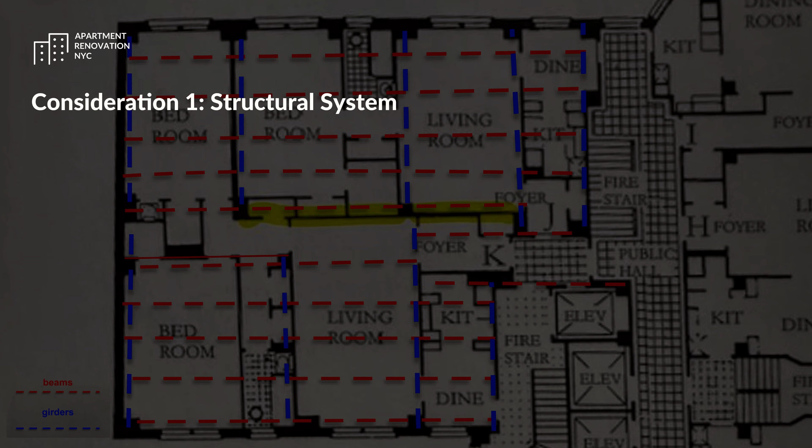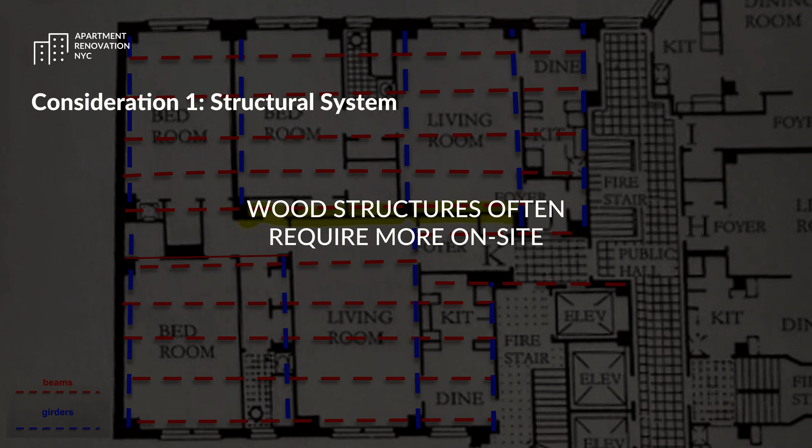Insights on New York City apartment renovation projects. We're going to discuss several typical considerations for renovation projects driven by the requirements of governing building codes, condo co-op alteration rules, and existing conditions limitations. Consideration 1. Structural system. The structural system of the building, whether wood or concrete, impacts renovation planning. Wood structures often require more on-site investigation to assess possible design changes, while concrete systems are generally easier to evaluate visually.

Consideration 2. Window placement. Window placement is important for light and airflow, especially for habitable rooms such as bedrooms, living rooms, dining rooms, and studies. Occupiable spaces such as bathrooms and kitchens require mechanical ventilation if there is no adequate window available. Floor plan layout design for apartment renovations in New York City is heavily impacted by existing window locations and sizes.

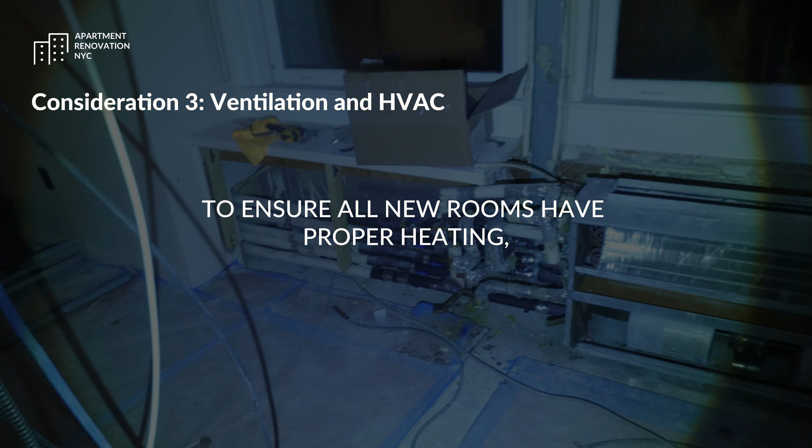Consideration 3. Ventilation and HVAC. Existing ventilation and HVAC layout must be considered to ensure all new rooms have proper heating, cooling, and ventilation after any floor plan changes. Some condo co-op board rules do not allow changes to existing building HVAC systems, while others do. An architect shall study house rules for each building in New York City carefully to be able to inform owners of floor plan design possibilities.

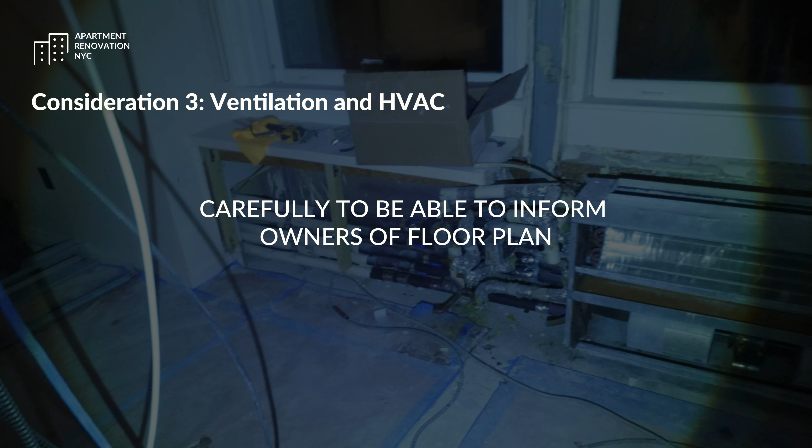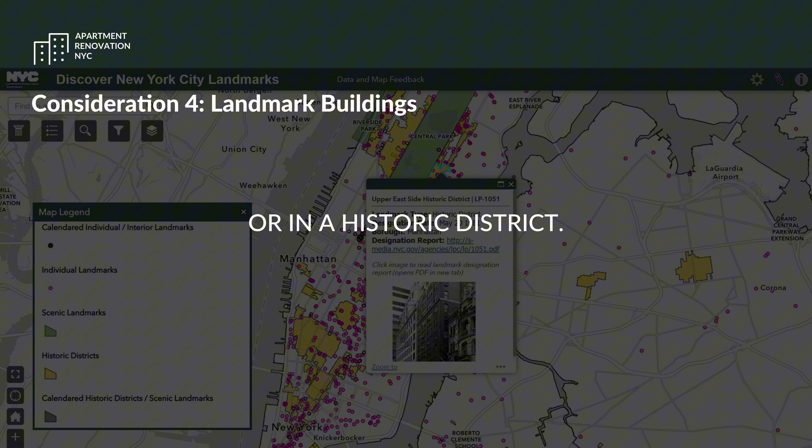Consideration 4. Landmark buildings. A building may be a historic landmark or in a historic district. If the building falls into these categories, the work being performed must be brought up to the Landmarks Preservation Commission, LPC, and have the appropriate paperwork filed.

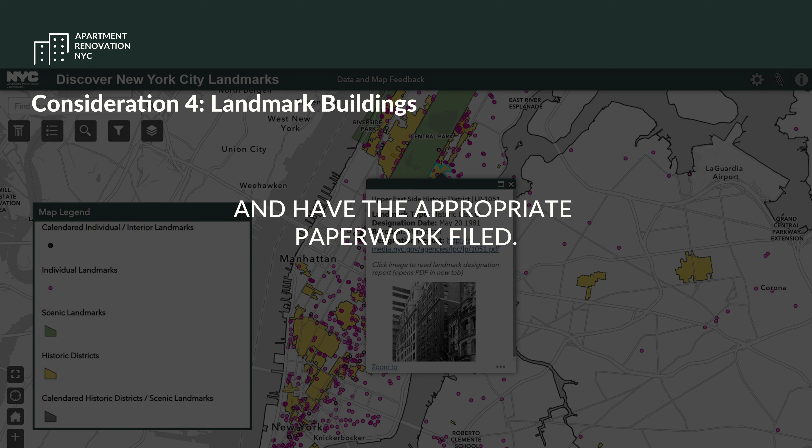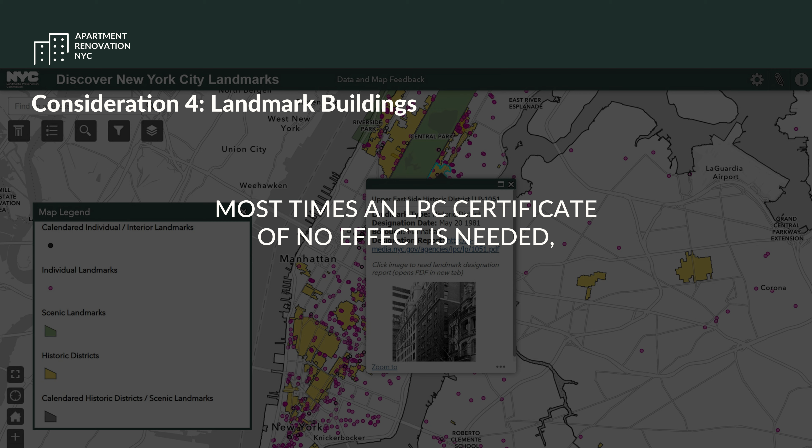A full LPC review would be required if changes are proposed to the exterior facade, including replacement of windows. For interior renovations in New York City, most times an LPC certificate of no effect is needed, which our office typically obtains within approximately 1 week.

Why renovating in New York City is unique. With so many pre-war and post-war buildings, the average New York City apartment in Manhattan is around 100 years old. If your building is older, be aware of the common surprises when completing an apartment renovation in New York City.

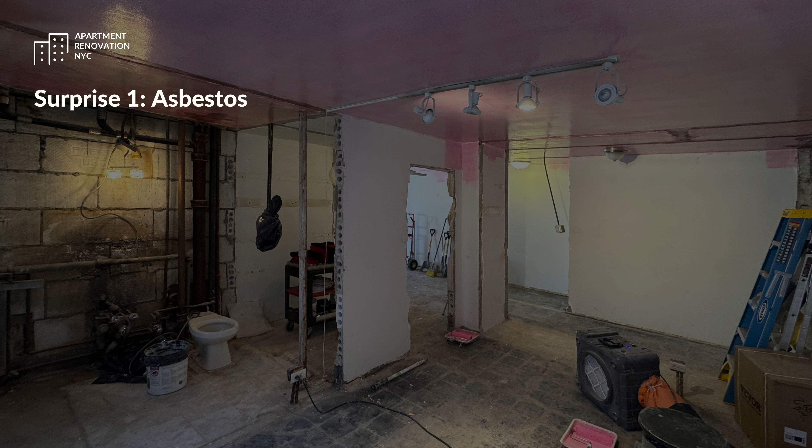Surprise 1. Asbestos. Asbestos is frequently found in old flooring, mastic, pipe insulation, and plaster. It requires sampling by a DEP certified asbestos investigator of all materials that are to be disturbed by the proposed renovation scope of work. If testing produces positive results, an architect shall strategize whether asbestos can remain undisturbed or shall be abated by a New York City licensed asbestos contractor based on the renovation design.

Surprise 2. Insufficient electrical loads. Each apartment renovation in New York City with proposed new or replacement appliances or equipment requires a licensed electrician to provide an electrical load letter for the architect's review. The electrical load letter would account for existing and new or replaced items and provide a summary on whether the apartment's existing electrical load capacity can support the proposed design.

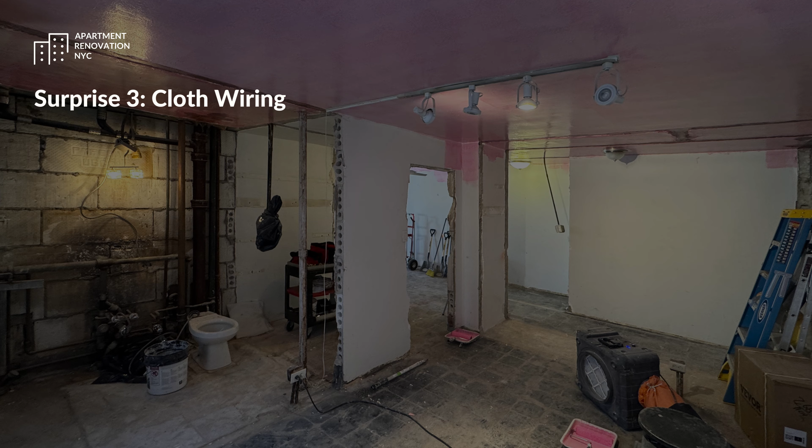From time to time, older New York City apartments cannot support modern appliances or air conditioning. An electrician may need to upgrade your panel and wiring as part of an apartment remodeling in New York City, which occurs most frequently with full gut New York City renovations. Surprise 3. Cloth wiring. Common in pre-war buildings, cloth insulated wires are outdated and unsafe. Full rewiring is typically required to meet code.

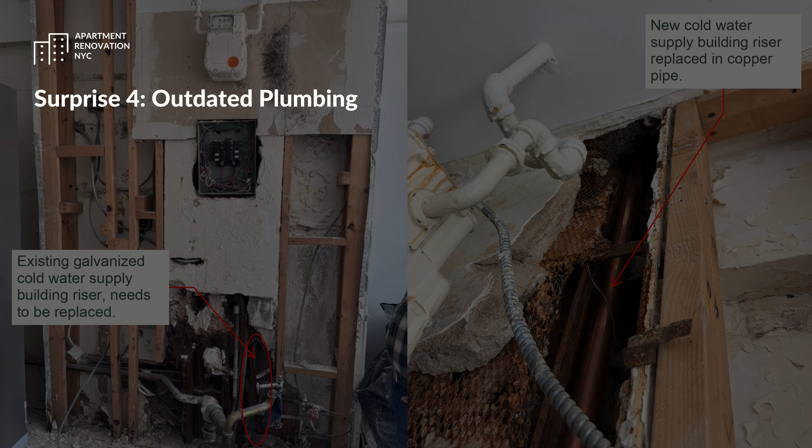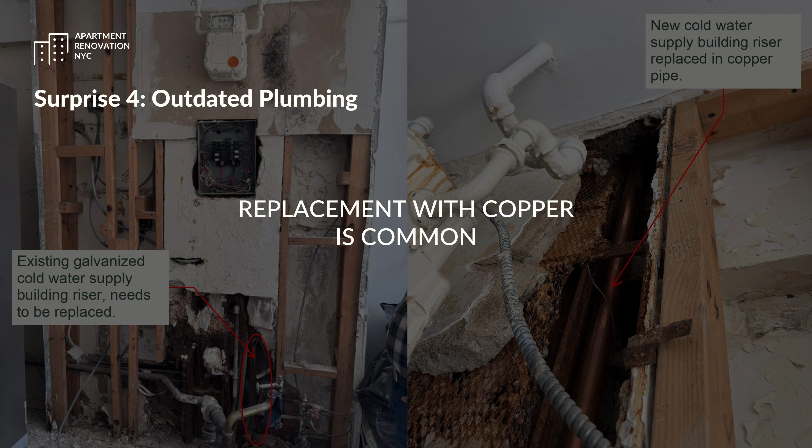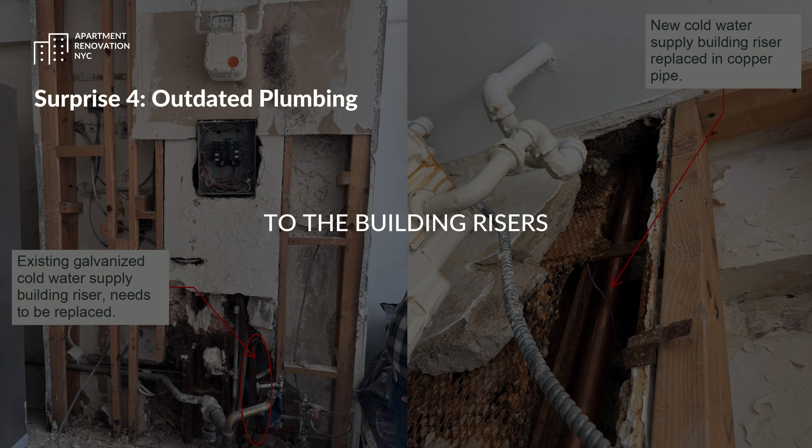Surprise 4. Outdated plumbing. Old galvanized pipes, commonly used in the past for building risers, often lead to leaks or poor water pressure. Replacement with copper is a common upgrade during renovations, especially during a bathroom and kitchen renovation in New York City. Typically, all branch lines need to be replaced to the building risers with any work on plumbing fixtures, unless replacement of fixtures is past the wall finish towards the interior space.

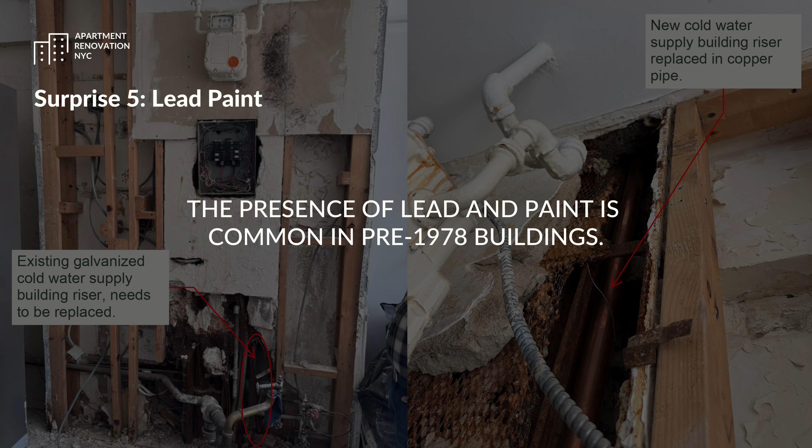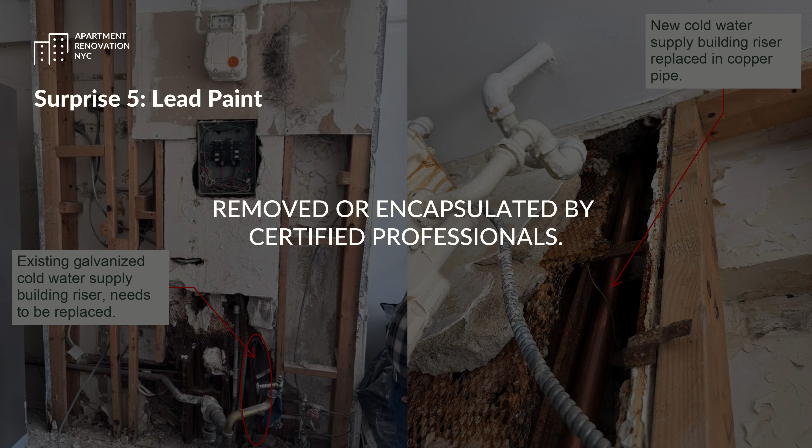Surprise 5. Lead paint. The presence of lead in paint is common in pre-1978 buildings. Surfaces must be tested and, if found, properly removed or encapsulated by certified professionals. This is becoming more frequent with Local Law 31, the Lead Abatement of 2023, which mandates testing of all dwelling units and common areas.

Hiring an architect for your New York City renovation. An architect is your advisor throughout the apartment renovation process, guiding you from establishing your goals and budget through design and technical drawings to contractor selection and construction oversight. Our team helps manage the project every step of the way, ensuring quality and smooth permit closeout.

Do I need an architect? Yes. If you live in a condo or co-op in New York City, your apartment renovation will need to comply with your building's alteration agreement and house rules. In addition to city permits, your plans typically require review and approval from the building's board. Both the board's review and the New York City Department of Buildings require signed and sealed drawings prepared by an architect.

An architect guides you through this process, coordinating with both building management and city agencies to keep your project on track and compliant. It is wise to review condo and co-op board rules early on in the design process. Alteration agreement breakdown. These documents outline what changes are allowed, as well as procedures for approvals, working hours, deliveries, and protecting shared spaces during construction.

Alteration agreements vary by building, but typically include scope of work review. A building's architect or engineer must review the detailed plans prepared by your architect, highlighting the scope of work being performed, ensuring your renovation complies with building standards, and helping to streamline the approval process.

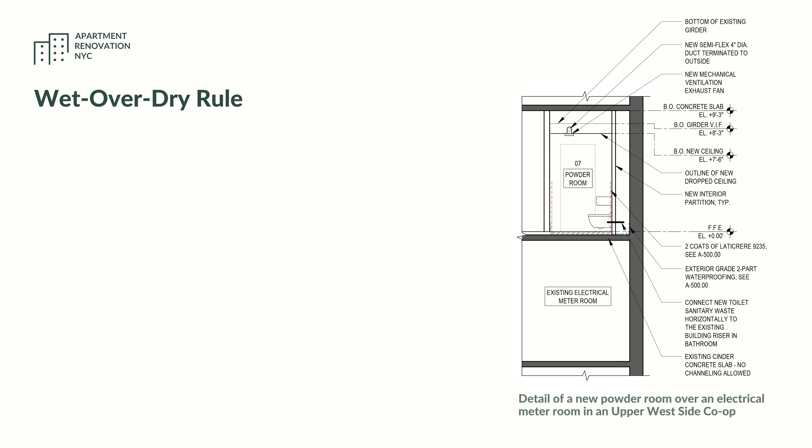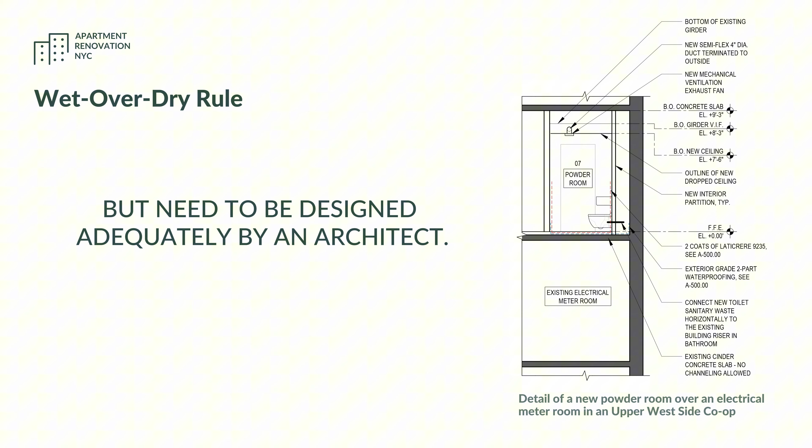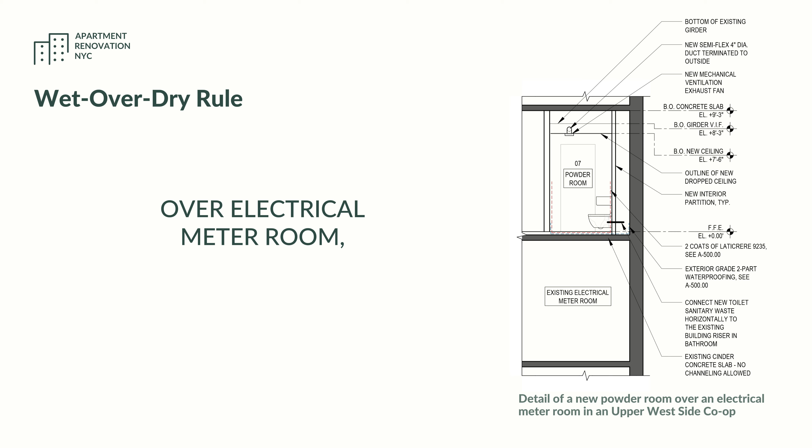Wet over dry rule. The wet over dry rule is a key consideration in New York City apartment renovations. It is an architect's responsibility to engage with the board and propose solutions to address any concerns. As a rule of thumb, wet over dry areas are accepted, but need to be designed adequately by an architect. Even in more complex scenarios, our team has designed wet over dry areas in the context of a new powder room over an electrical meter room, which required careful consideration for the new powder room floor assembly.

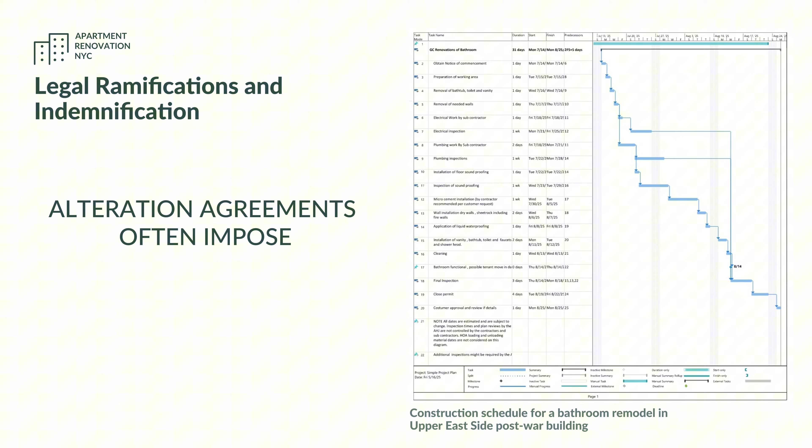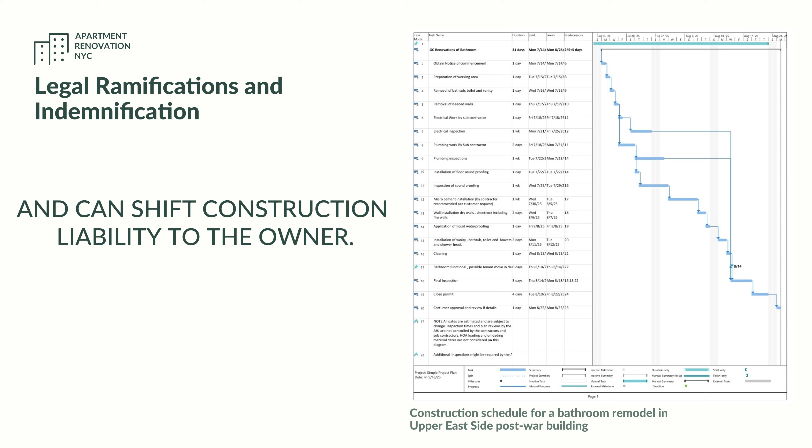Legal ramifications and indemnification. Alteration agreements often impose strict timelines, financial penalties for delays beyond the estimated renovation completion date, and can shift construction liability to the owner. Retaining an architect experienced in construction administration and contractual matters is essential.

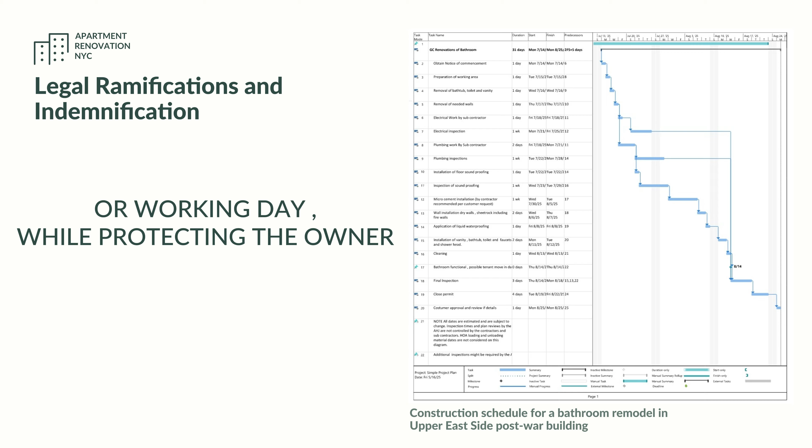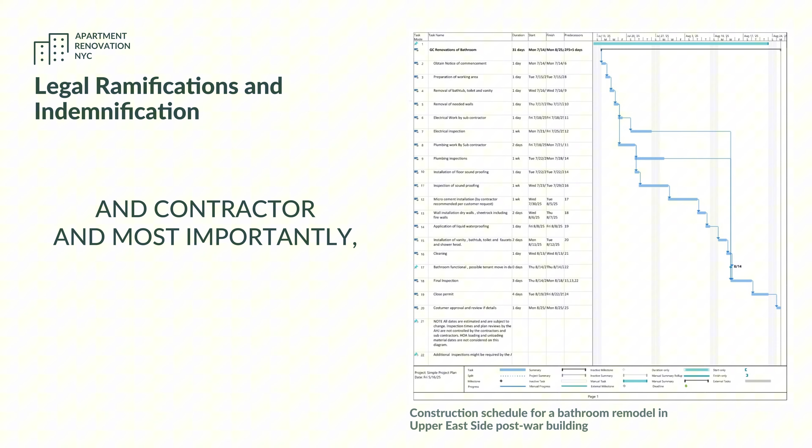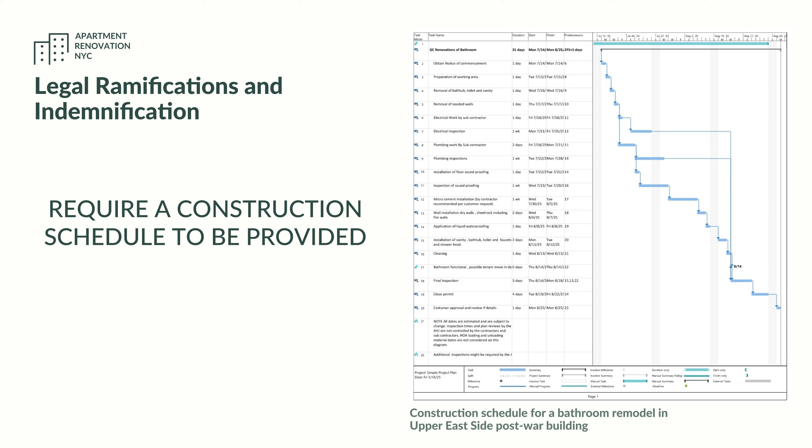A well-written contract between owner and contractor requires the contractor to complete work within the agreed number of calendar days or working days, while protecting the owner by introducing a clause on liquidated damages, where the contractor is responsible for fees and delays. It is critical that an architect advises on the form of agreement between owner and contractor, and most importantly, the owner should not sign a contract with a builder on their own and without an architect involved. Condo co-op boards typically require a construction schedule to be provided for board or management approval.

Building condo or co-op board review. Your building will have its own architect conduct an alteration review of your renovation plans, primarily to protect the building from liability. The cost for this review is sometimes passed on to the owner, and in Manhattan or Brooklyn typically ranges from $1,000 to $2,000. This process can involve lengthy communication and potential delays, especially without an experienced design team.

The key to a successful condo co-op board review process is that your New York City apartment renovation architect addresses the building alteration agreement requirements within the initial submission of the drawings for the board's review. It normally takes a few rounds of reviews until a renovation application is fully accepted. Once management completes their review, the board will consider your plans for final approval, which is required before you can start work. Our firm coordinates closely with management and the board to keep things moving.

Budget and timeline for your New York City renovation. A well-planned budget and realistic timeline are essential to a smooth apartment renovation in New York City. Whether you're pursuing a full gut renovation or looking for a more affordable remodel in New York City, with variables like building approvals and board reviews, it's important to anticipate where additional time or costs may arise. We help establish a clear financial plan and schedule, guiding you through each phase and keeping your project aligned with your goals.